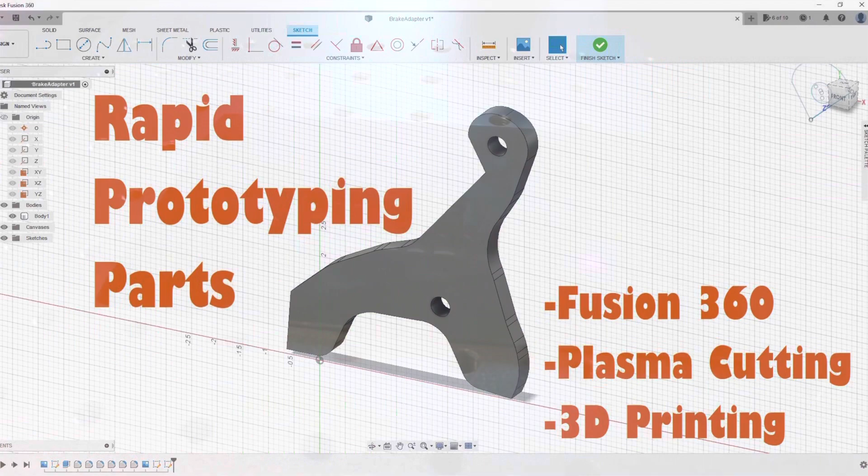This is a video on rapid prototyping of parts, specifically drawing some stuff up in Fusion and then outputting those parts to a plasma cutter and then also to a 3D printer, in relation to my tractor build.

This specific example is from a YouTube friend who is also building an articulating tractor, and he has to put hydraulic brakes on his. He mentioned that he's designed this adapter, and that if anybody wanted to utilize those same brakes on their Cub Cadet, he'd send them along this template, and they could copy that and throw the brakes on their tractors.

I was like, well, if you drew that up in Fusion, you could easily reproduce that on a plasma cutter, or send them a drawing specifically, and they could go get it cut, or they could print that drawing out on a piece of paper, and then glue that onto a piece of metal and cut it.

Anyways, it's a very quick way to reproduce parts and to get them in the computer and whatever.

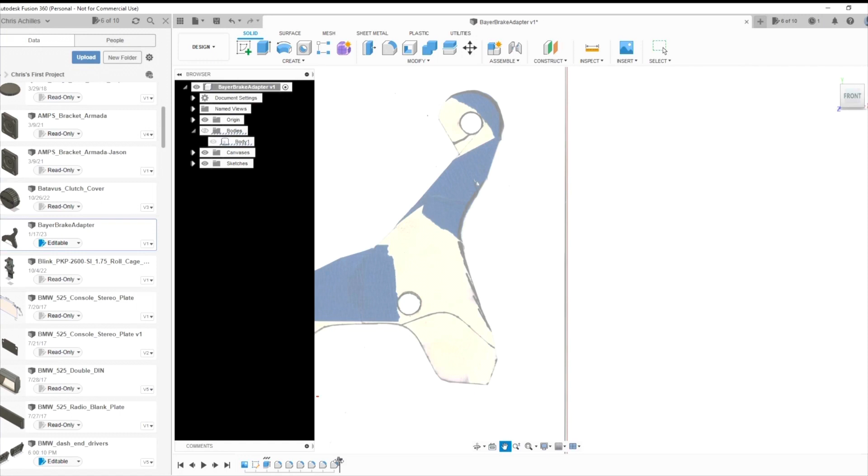So anyways, I was going to show how I do this pretty quick. I tried to do this video before, but unfortunately the scaling was all wrong and it didn't come out good, so everywhere my mouse was, it wasn't actually at that location on the screen. So I had to scrap that and start over.

So I don't have all my steps recorded. I'm just going to show you an example really quick.

What you want to do is start with a blank screen, and then you start with a canvas, and you'll insert this from your computer.

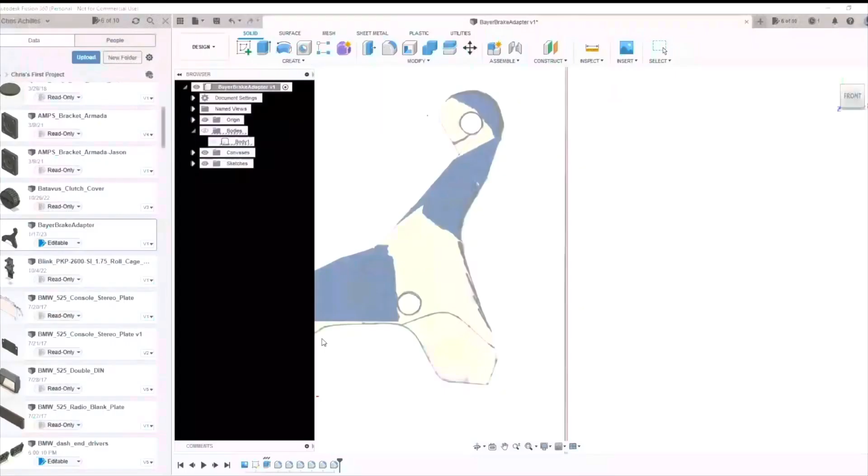So you take a JPEG and put it on your screen, and then you want to come over here and choose, making sure that it's selectable. The default is not selectable. So you'll put that on the screen, then you're going to scale it.

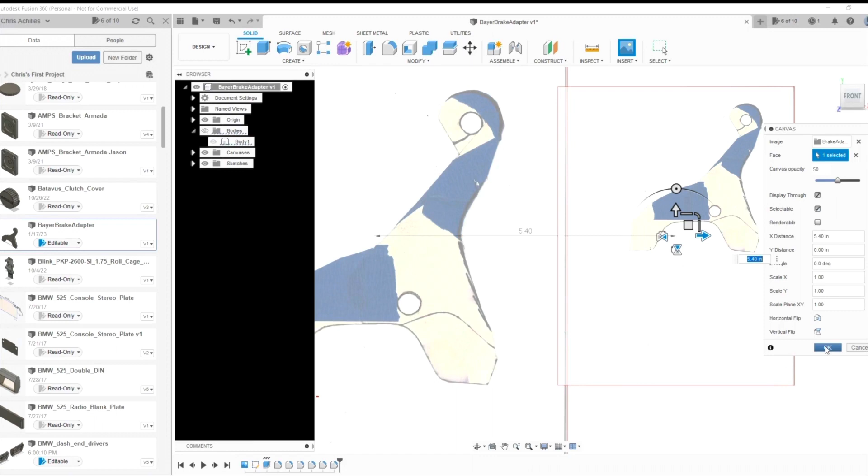Because this is obviously not the right size, it just doesn't know what size it is, it just kind of brings it in a random size.

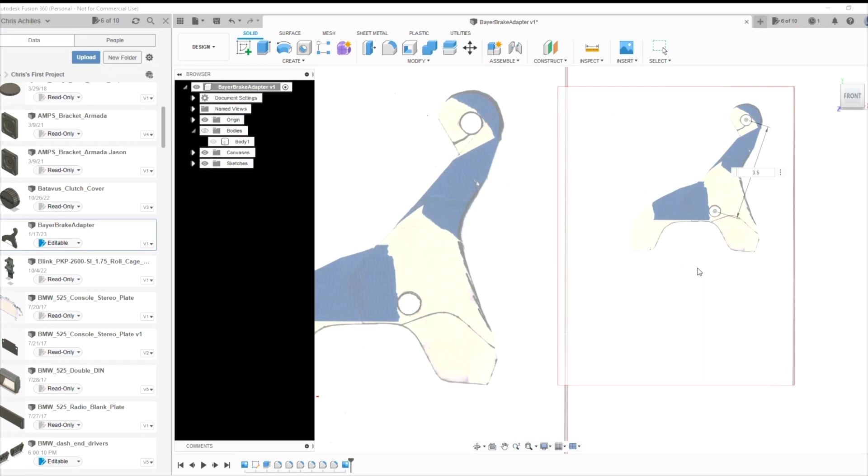So you're going to calibrate that, and you're going to choose two known spots. So on this one, for example, you will take the center diameter of those, and you know the exact spacing is 3.5 inches, and then that instantly brings it up to the correct bigger part size.

And then you just go around the object. You create a sketch on this surface, and for example, you'll create an arc.

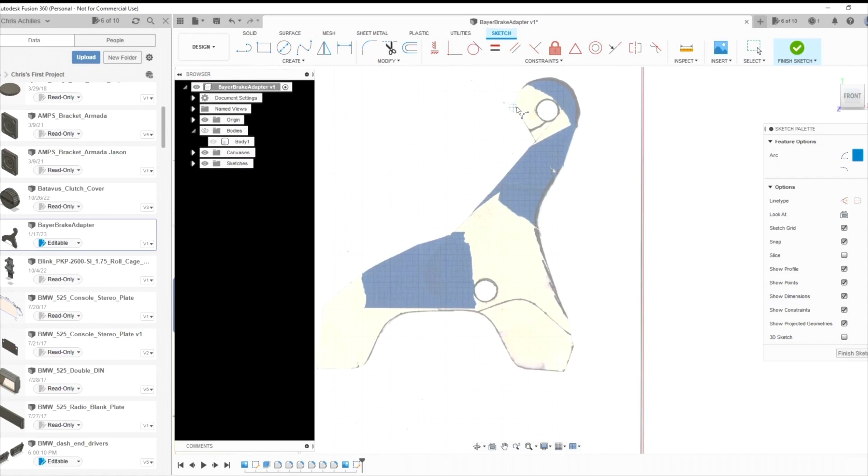You select this point right here, and then you choose another point. You choose your arc radius, and you just kind of keep producing these segments to where they look right.

I mean, some of these don't have to be exact. Some of these other spots, like I say, you want to do a line down here, a line from here to here - whoops, it's doing an arc still - and do a line, and we'll do a circle.

So you can choose the quick ones up here, or you can do, like, a center diameter, and so I'll choose the center of it.

Or for this one, you don't want to do that, you want to do 3 points, so you choose 3 points on the circle, and then you get the third one, and that gets you a pretty good center point on it.

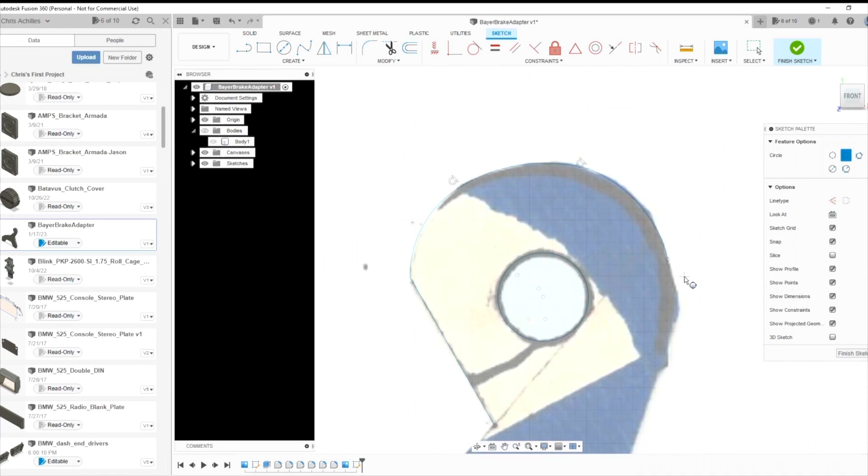And so you just go around the whole thing, and then when you're done, you can take that off and you can see your shape that you did.

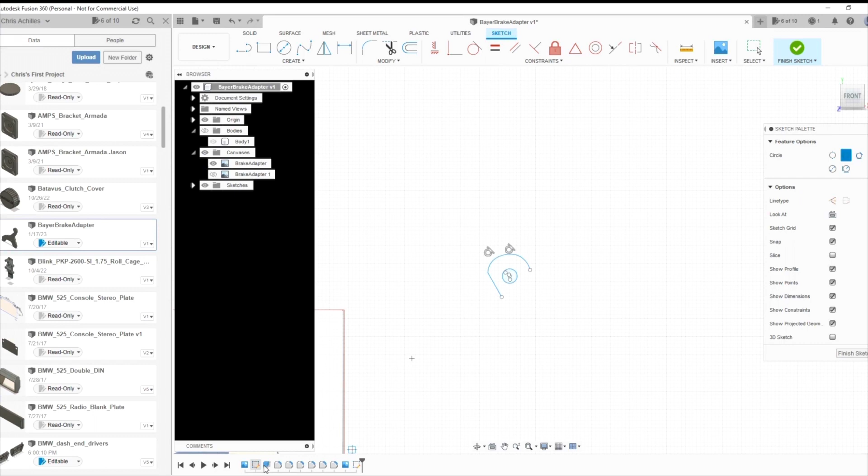So I'm just going to go back over to this one here, which I've already done all the work on. I'll show my body on here - bodies - and you can see, if you take the canvas out from underneath, it's a pretty good comparison of the two.

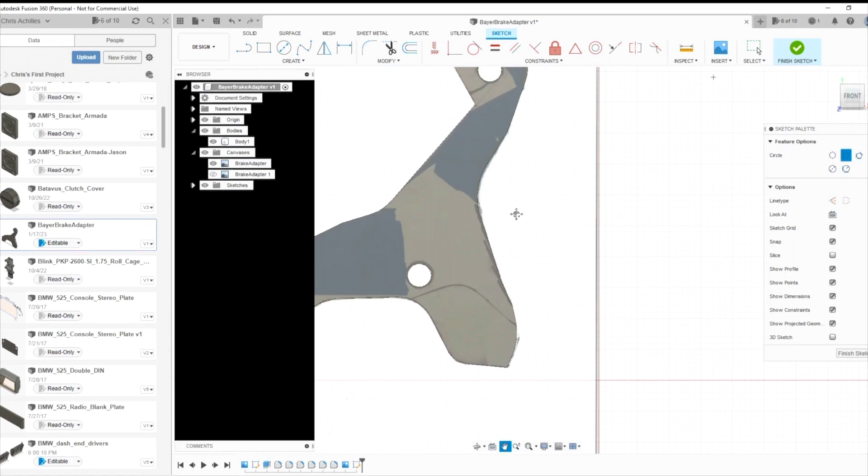One thing I did do on this one was a bunch of fillets on some of the sharp edges, just to really - you can see down here, sharp edge, sharp edge, sharp edge, and some of these over here - so I just went through and filleted a bunch of edges.

That really smooths it out a little bit.

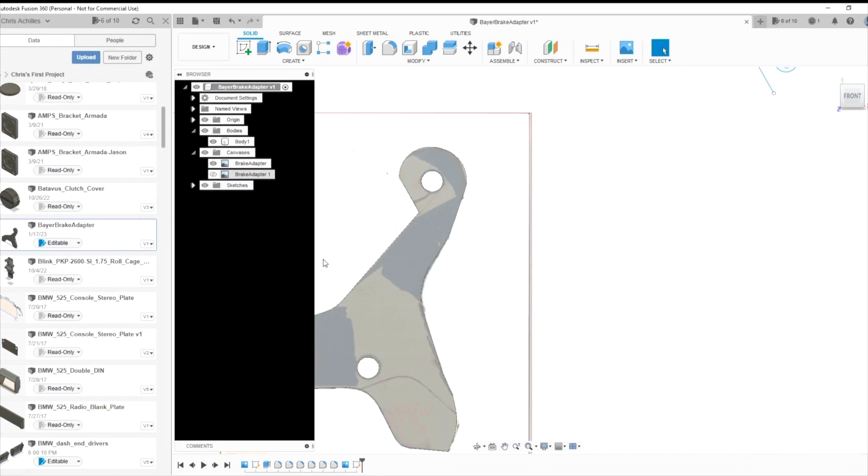And then you can send this along, so we'll get rid of this background. So there's your part - you draw your two-dimensional sketch of it, and then you extrude it to a thickness.

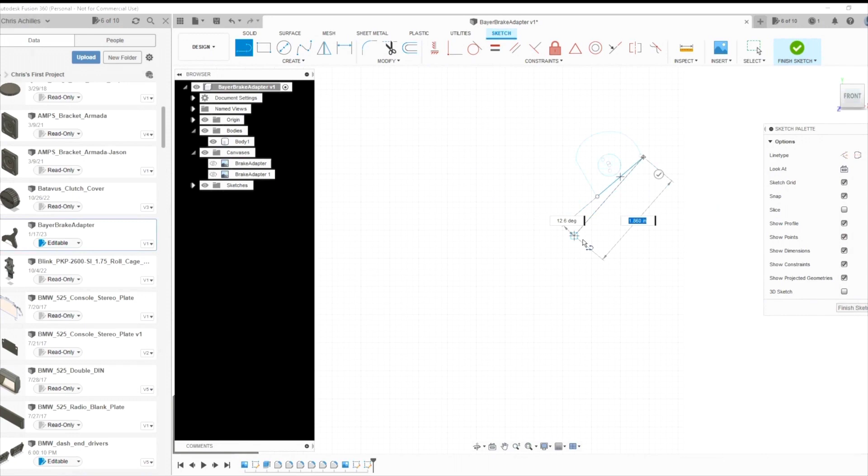Actually, I didn't show you that. So for example, I take this one here, finish the sketch, put these two here, and let's do this - here you're gonna make it whatever size you want, that's 3 inches, so you can just create. So this, you create your thickness, whatever I want - this one, for example, I just made like a 3/8 of an inch plate or whatever.

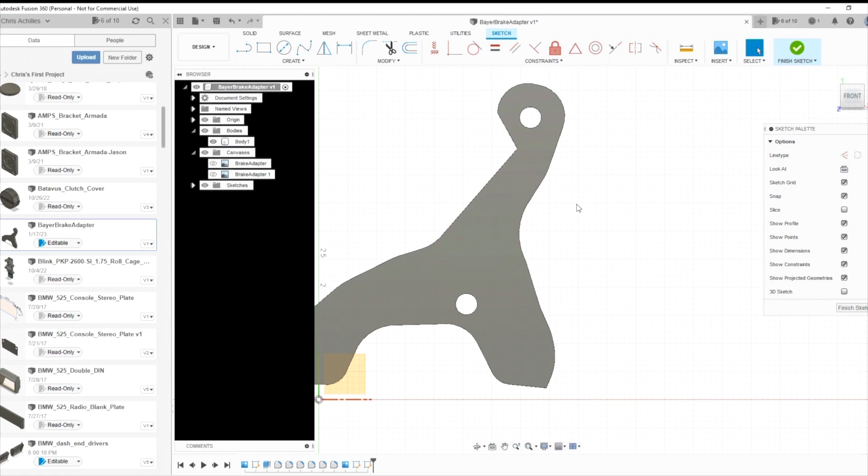So then I just exported this as a DXF file and sent that to my friend, and he plasma cut it. You can also do, say you wanted this in a plastic part - you could just create a make, select that, and send it as an STL file to a 3D printer or whatever. I do a lot of parts with plastic as well, and I'll show that later on, how I made a part for my tractor out of both plasma cut steel and plastic.

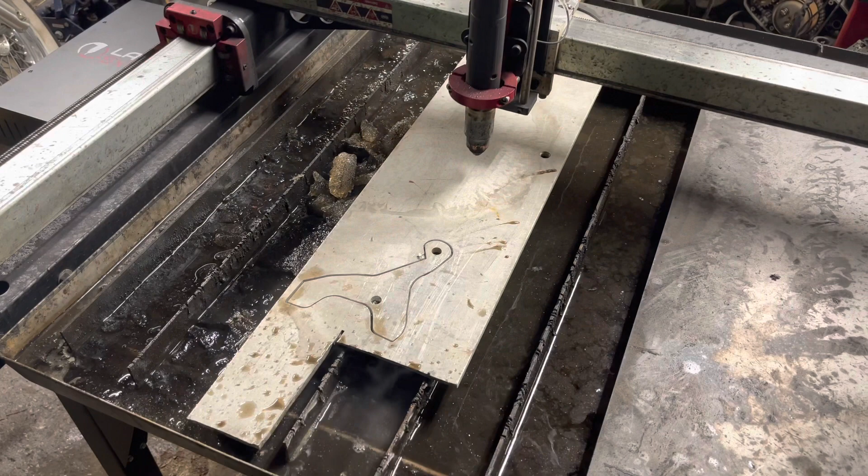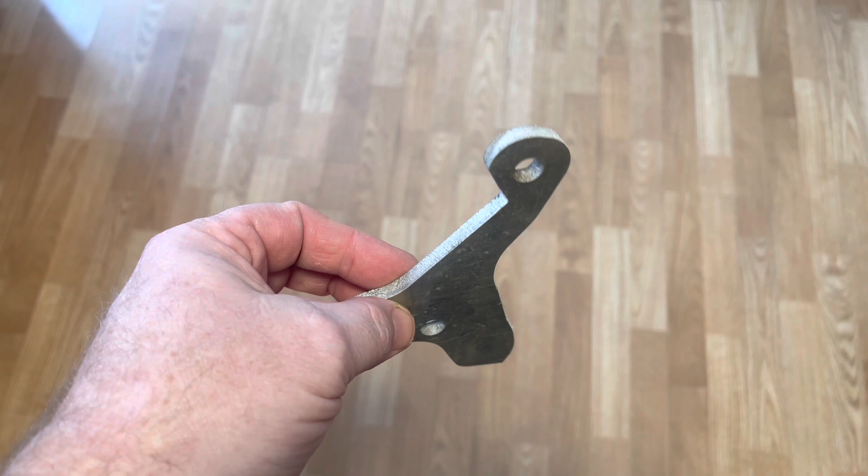This part came out really good considering how fast it went. Still needs some finishing up - we didn't actually set the settings exactly for 1/4 inch aluminum, it was just set for 1/8 inch steel, but aluminum cuts easier than steel, so we went with it. But good enough just to show the process.

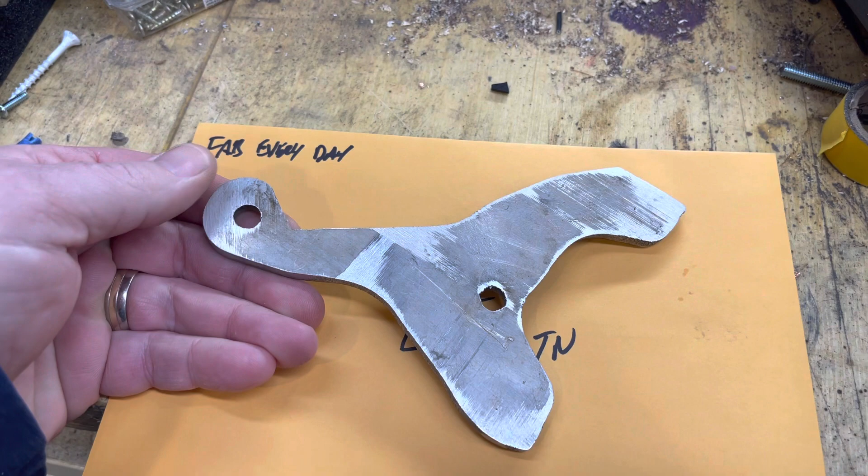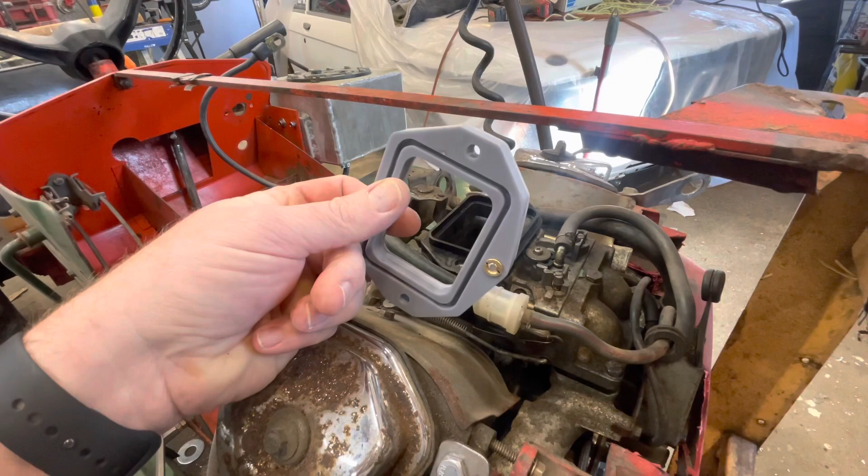So here's an example of another 3D design or modeled part. So I print on a 3D printer - this is the resin printer, it comes out really nice prints. So I had to have some sort of an adapter to make an air filter, and so I created this.

It has a recess inside. Then when I finally make this permanently, I'll just put a little silicone in there, seal that in there. So it's got the 2 mounting holes on it, and I have this brass insert to hold the strength of the screw.

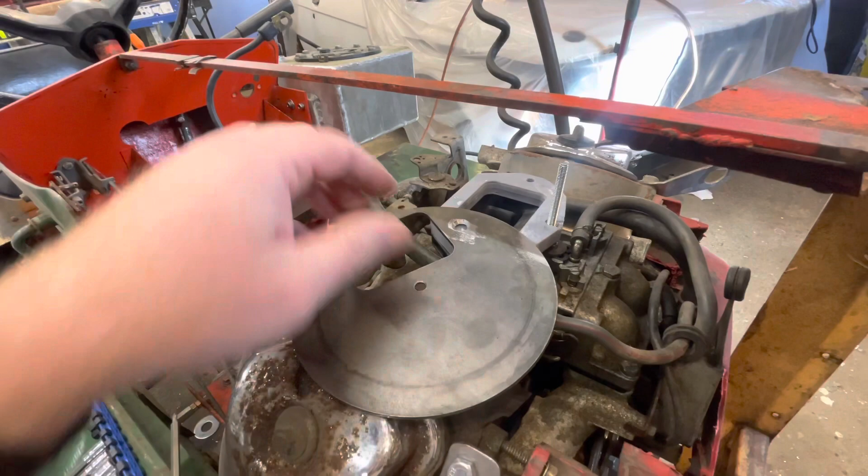And then, during the same model as a separate component, I made this steel plate, which I had plasma cut. So because it came off the exact same drawing, it's an exact match - all the holes line up, everything lines up perfectly well. And so this goes on here.

And it's been out in the garage for a while with no protection against dirt and grime and dust. Obviously can't run it without a filter.

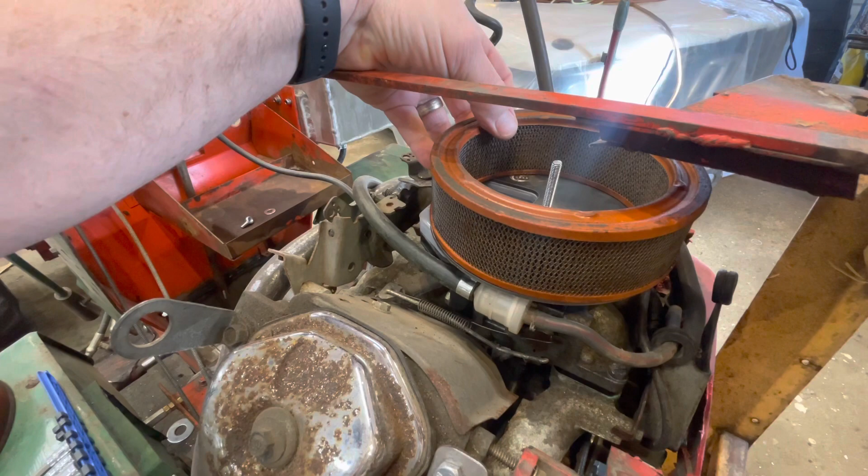So obviously we'll paint this up and get it pretty to match the engine when it's all done. So it just takes the air filter, it goes on there, and then it has a standard air filter cover. This came off one of the original engines for the case, or the Kohlers, whatever you want to call it.

So now I've got an air filter - I already designed that, modeled that up in Fusion, maybe an hour or something, and then print it out. It took like an hour and 45 minutes or something to print it, and then plasma cut the steel.

But it's all super easy to make, and it's practical purpose for some of these - it'd be hard to make a nice finished part afterwards otherwise. So yeah, utilizing CAD and 3D modeling is really beneficial for some of these projects, where you can accurately produce parts that look a lot more professional than just cutting and grinding, and take good measurements and the parts fit real good. Thanks for watching.